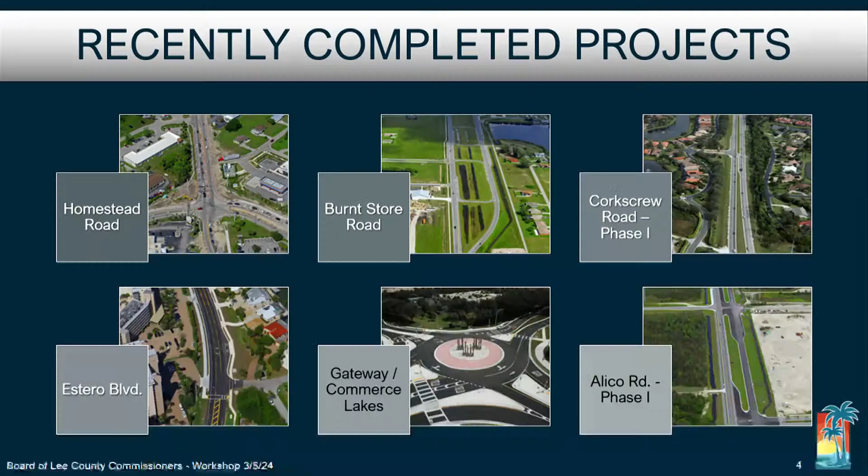We wanted to provide some highlights over the last few years to start things off. As you will recall, we completed 4-laning of Homestead Road from Alabama Road to Sunrise Boulevard in July of 2020. We also completed the southern phase of the Burnt Store Road 4-laning in April of last year, completing a 4-lane widening from Pine Island Road to Van Buren Street in Cape Coral. On Corkscrew Road, Phase 1 of that widening was from Ben Hill Griffin Parkway to Bellaterra Boulevard, and it's nearing completion later this month.

Sorry, I went a slide too far. Estero Boulevard improvements were also completed in August of 2022. We reconstructed Estero Boulevard with new utility lines, improved sidewalks, drainage, and other related safety improvements. We completed the first roundabout on Gateway Boulevard at Commerce Lakes Drive in September of '21. Another roundabout at Griffin Drive is currently nearing completion. Finally, we also completed the first phase of Alico Road widening from Ben Hill Griffin Parkway to Airport Haul Road in June of '21, in anticipation of the future Alico Connector project. These 6 projects represent a total construction cost of $184 million.

Next, we wanted to highlight all of the projects that are currently under construction. As I mentioned, the roundabout at Gateway Boulevard and Griffin Drive will be complete this month with a ribbon cutting scheduled for March 28th. We hope to see you all there. This is a $4.7 million intersection safety project that was awarded on January 17th of '23 and will be completed ahead of schedule. Next, the board awarded a $27 million contract for Phase 1 of the top priority Three Oaks Parkway extension project on May 16th of '23, and construction on that project is well underway. The first phase is expected to be completed in the spring of '26.

Phases 2 and the Daniels Parkway 8-laning are 90% designed at this time, and we anticipate construction starting on these phases by middle of next year. The board also awarded construction of the Big Carlos Pass Bridge replacement in February of '23. This is a $104 million project. Construction began in June of '23 with completion slated for the summer of '26. Recently, the board also awarded construction of the Ortiz Avenue 4-laning from Colonial Boulevard to MLK. This is a $35 million project with construction beginning in April. Targeted completion for this project is April of '26.

We're currently also working with FDOT on the replacement of the Little Pine Island Bridge in Matlacha. The bridge was originally slated for replacement in 2027, but after sustaining damage from Hurricane Ian, the state and county worked together to advance replacement of the bridge to this summer at a cost of $2.5 million to Lee County currently. Construction is also underway on the three-laning of Littleton Road from the roundabout at Corbett Road east to US 41. The board awarded this contract in October, and construction is expected to finish in the summer of 2025. Finally, the board also awarded the contract for Phase 2 of the widening of Corkscrew Road from Bellaterra Boulevard to Alico Road in December. Notice to proceed was issued last month, and we expect a 2-year construction timeline with completion slated for February of '26.

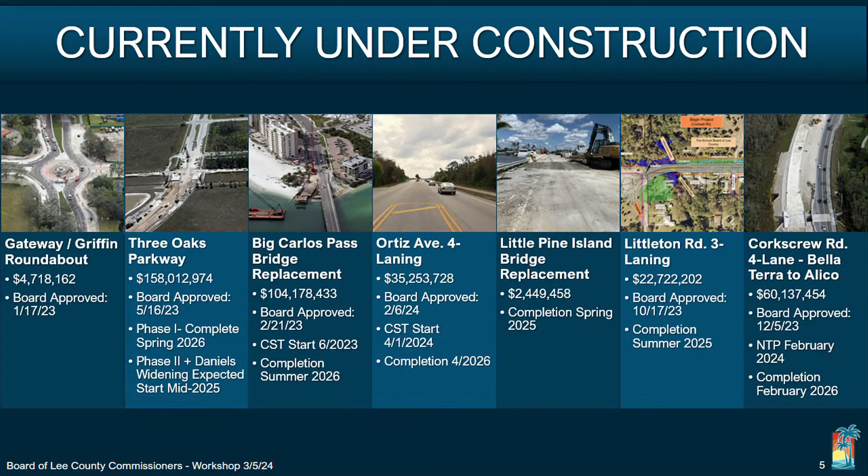In addition to what's under construction, we also want to highlight projects currently in the design or PD&E phase. The continuation of the Three Oaks Parkway extension, along with the 8-laning of Daniels Parkway, is at 90% design currently. We're expecting final plans later this year, and construction start dates for those two phases are expected middle of next year.

The Alico Connector is another project we're really excited about. The widening from Airport Haul Road to Green Meadow is 90% designed now, and we hope to award construction of this phase later this year.

The future connection of Alico Road to State Road 82 and Sunshine Boulevard, including a 4-laning of Sunshine Boulevard from State Road 82 north to Southwest 23rd Street, is at 30% currently. We anticipate construction of these phases to begin 18 months after the widening of the existing Alico Road section starts, due to additional permitting efforts needed.

We're nearing a public hearing on the PD&E phase for the Cape Coral Bridge replacement later this year as well. That project is moving forward to 60% design over the next 12 months, at which point we will come back to the board with a recommendation on how to deliver the project.

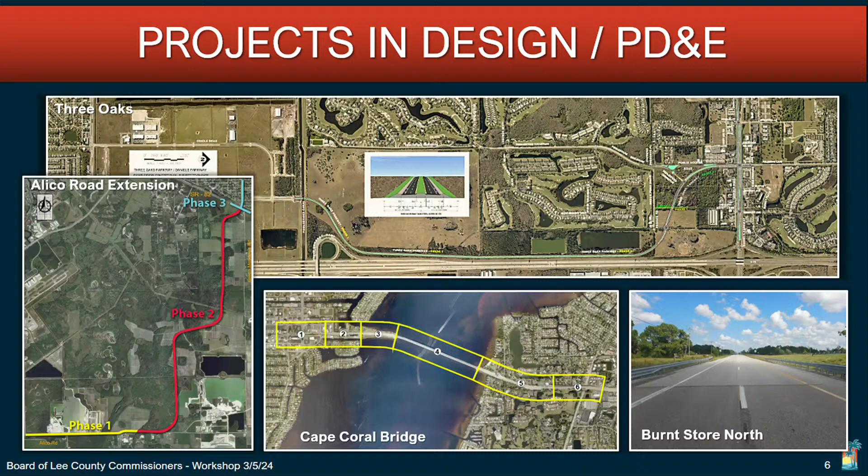Finally, we have FDOT overseeing the PD&E phases for the rest of the Burnt Store Road widening from Van Buren Street north to the Charlotte County line. FDOT and the county decided to take this project to 60% design through the PD&E phase with the development of a design-build criteria package to make the project shovel-ready for design-build construction. We expect to go after any grant opportunities available to deliver the project with the support of the state.

We wanted to talk individually about some of the projects that are under construction, and here starts a series of those slides. As discussed, the Three Oaks Parkway extension is the top priority on the board's rankings, and the first phase is currently underway. The box culvert over the Fiddlesticks Canal is largely complete, so we're now able to move material from the south to the north through the alignment.

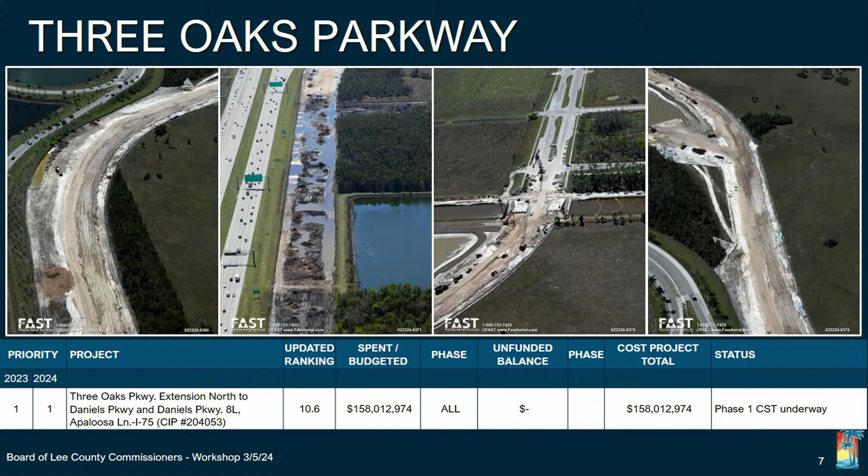Phase 2 and the Daniels widening are at 90%, and we anticipate construction beginning on those phases sometime next year. The project in total is estimated to cost over $150 million, with completion expected in 2028.

This slide shows the progress that's been made on the Big Carlos Pass Bridge replacement. The project is the number 2 priority from last year's tiers and is valued at $104 million for construction. Construction activity started in June of 2023 with a 3-year delivery timeline.

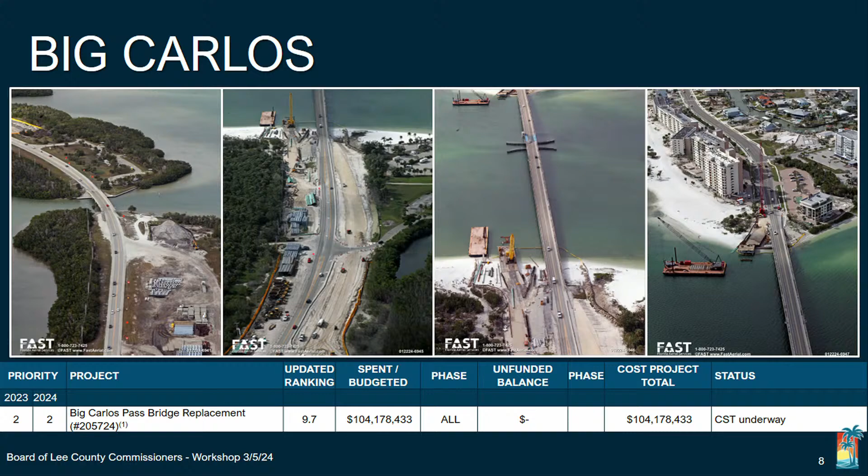The board recently awarded the 4-laning construction of Ortiz Avenue from Colonial Boulevard north to Martin Luther King Jr. Boulevard in February. Construction is expected to begin in April on this project with a 2-year delivery schedule. This is the number 4 priority of the board's last transportation tiers, and construction is valued at $35 million.

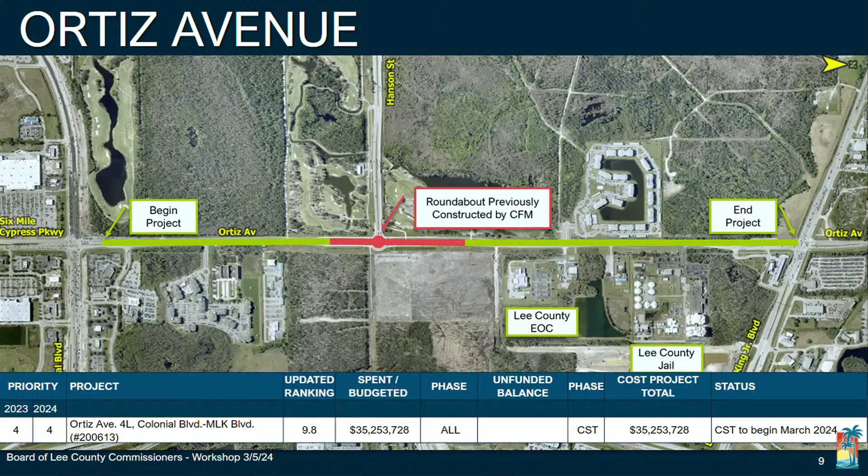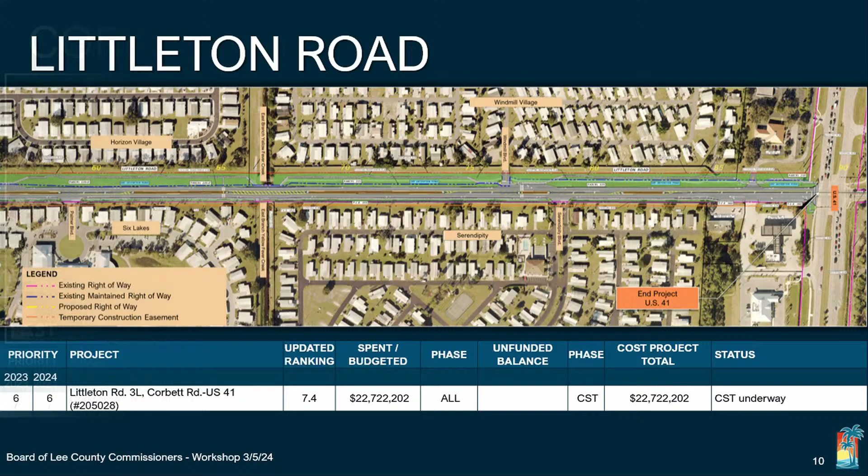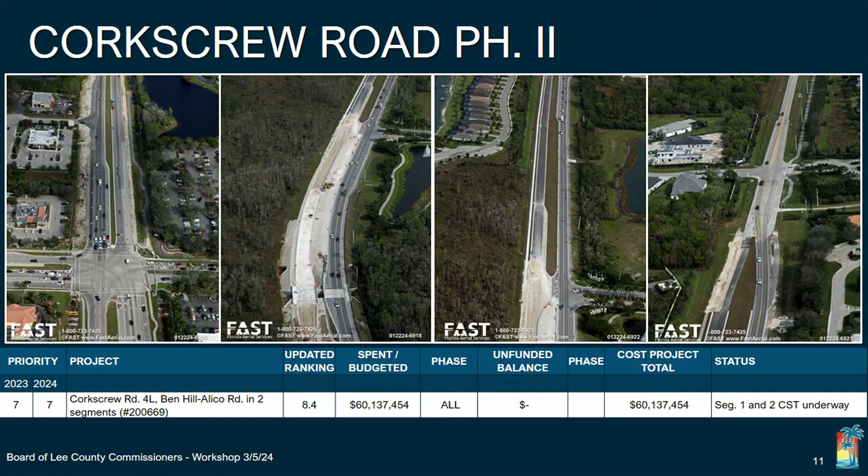The second phase of Corkscrew Road widening was the number 7 priority of the board in last year's tier discussion. The contract was awarded by the board in December. The total value of both phases of Corkscrew Road totals $60 million. Phase 2 construction began in February of this year with a 2-year delivery schedule.

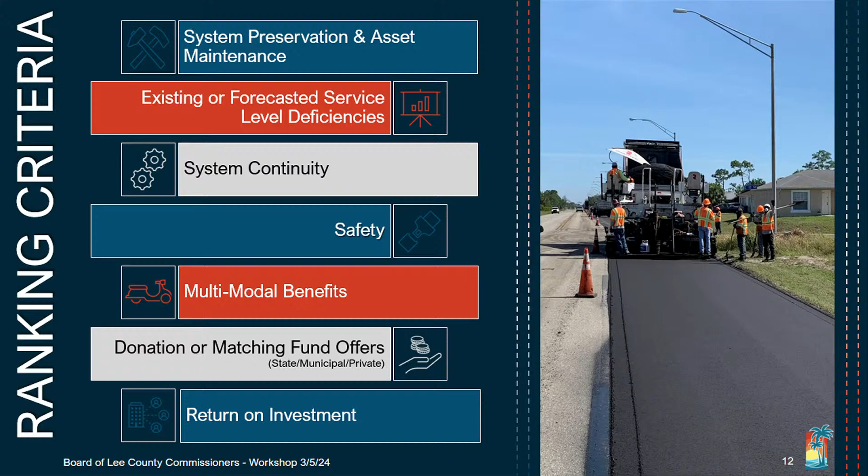So this is a familiar slide that the board's seen before. These are the criteria used to prioritize projects in our transportation tiers. We evaluate every project based on preservation of the asset, level of service deficiencies (existing or forecast), continuity of our transportation network, multimodal value, grant participation, and most importantly to DOT, safety.

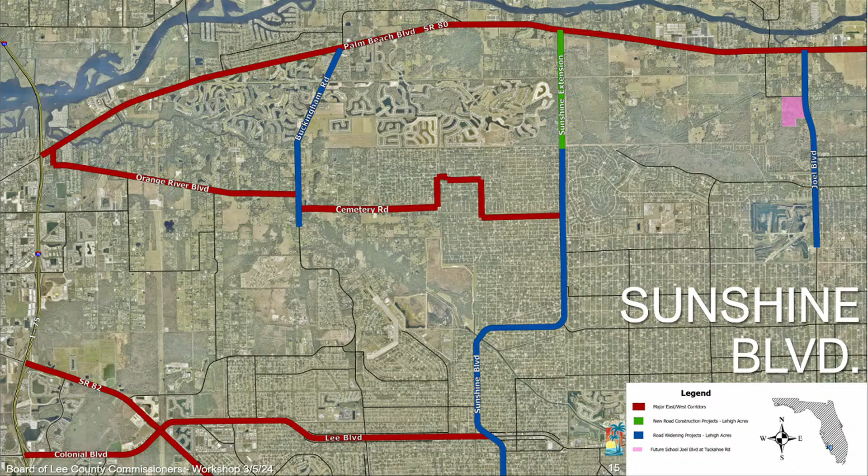There are 2 arterial roadways, and we are starting to see the need to address capacity on these roads. This is where Sunshine Boulevard comes in. We have the Alico Connector project in Tier 1 that ties into the southern portion of Sunshine Boulevard and includes widening of Sunshine to 23rd Street Southwest. Initially, our plan was to carry the widening to the north on the existing two-lane sections until we got to 75th Street, and then proceed with the Sunshine Extension.

Last year, DOT commissioned a study after the Sunshine Extension was added to the long-range plan. We wanted to know two things. One, would the Sunshine Extension provide enough relief to Buckingham Road and Joel Boulevard? And two, would the two-lane sections of existing Sunshine Boulevard function acceptably in the interim if we built the four-lane extension first?

The study showed us that the delivery of the Sunshine Extension as the next phase will be necessary to provide relief to both Buckingham Road and Joel Boulevard, and the two-lane sections of existing Sunshine Boulevard will continue to operate acceptably if we advance the extension first.

I've also highlighted a property that you'll see in the third inset here in the southwest corner of Joel Boulevard and Tuckahoe Road. That property is owned by the Lee County School District. They have plans to build a new high school in 2028 and a new middle school in 2030 on this property.

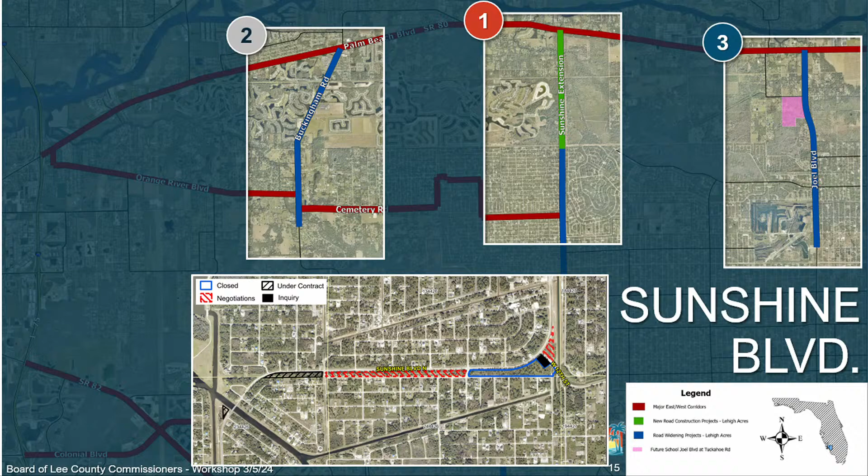We've talked about this a lot in the past, so we wanted to highlight a little bit of how we have expedited some of our projects.

By our discussion on Sunshine Boulevard, we're advancing right-of-way acquisition where possible to help deliver projects faster. We're also working on advanced right-of-way acquisition on Burnt Store Road North, which is under PD&E now. Additionally, we aggressively phase our projects to get some level of construction moving while we await right-of-way acquisition and permitting efforts to be completed. Examples of this are Estero Boulevard, Burnt Store Road's first three phases, the Three Oaks Parkway extension, the Alico Connector, and Corkscrew Road.

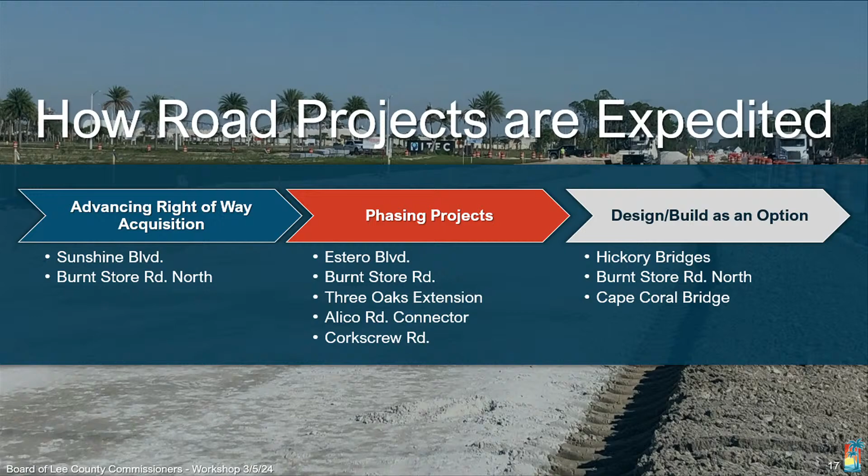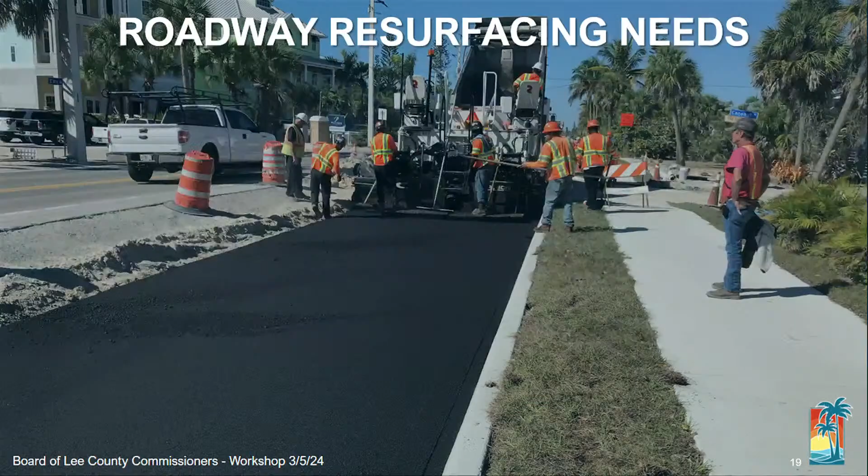As you will remember, we suspended our resurfacing program during the pandemic and temporarily again after Hurricane Ian. We used the downtime to do a wholesale reevaluation of our pavement conditions. We completed that effort last fall, and in order to get pavement conditions back to core levels, we need an additional $18 million per year, for a total of $28 million per year over the next five years.

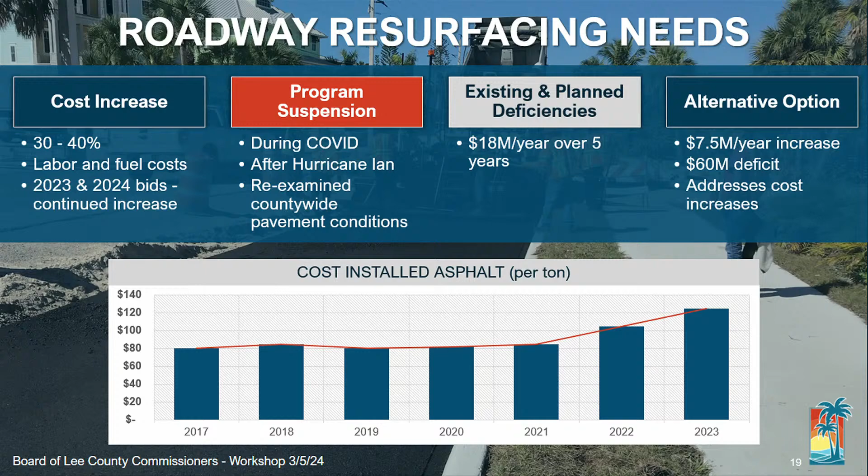Alternatively, we could account for the increase in asphalt costs and the cost increases we're seeing for ADA upgrades with the addition of $7.5 million to our resurfacing budget, for a total of $17.5 million a year. This still will leave us with a deficit of $60 million in five years, but it will help us keep up with rising costs. Now we'll go back to the questions.

So back to our original questions: we're asking the board if you agree with our transportation priorities as laid out in this presentation. Also, do you agree with us bringing forward a $7.5 million reserve transfer to meet these needs? And finally, are there any other questions or input from the board?